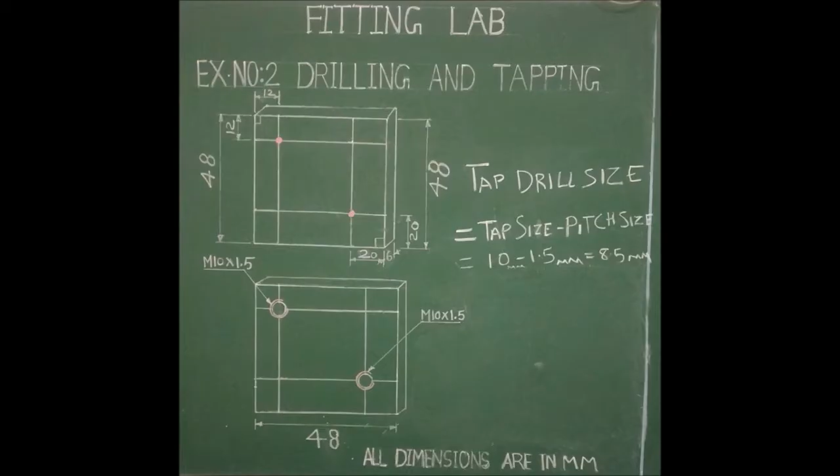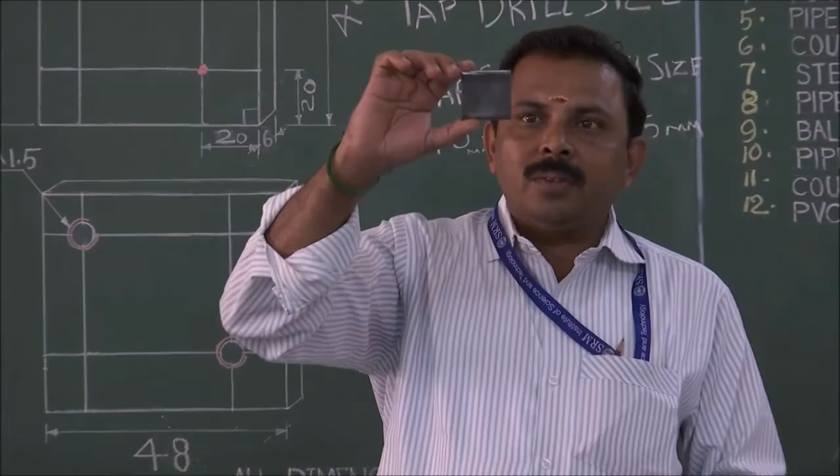Welcome to fitting lab. Today we will do the second exercise, drilling and tapping. I will cover the single workpiece only. The workpiece is made up of mild steel, size 50 mm length, 50 mm breadth, 6 mm thickness.

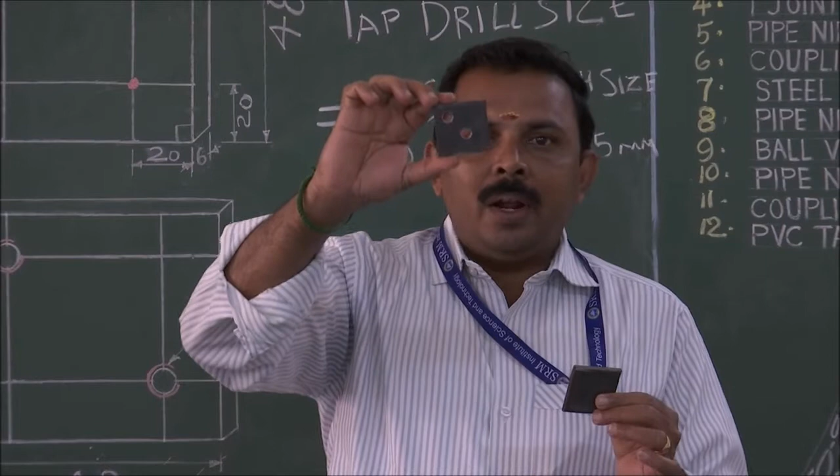We will make a drilling and tapping like this. I will tell step by step how to make a drilling and tapping. First you use the fitting tools, then I will explain how to make a drilling and tapping.

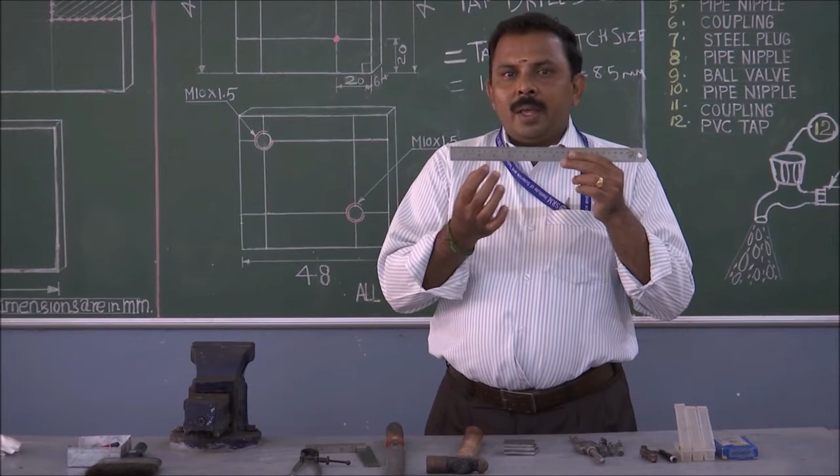First is a steel rule. The engineering name is called a ruler. This is made up of steel, so this is called a steel rule. The accuracy is 0.5 millimeter. It has millimeter, centimeter, and inches. 1 centimeter per 10 millimeter. 1 inch per 25.4 millimeter. This is one of the measuring instruments.

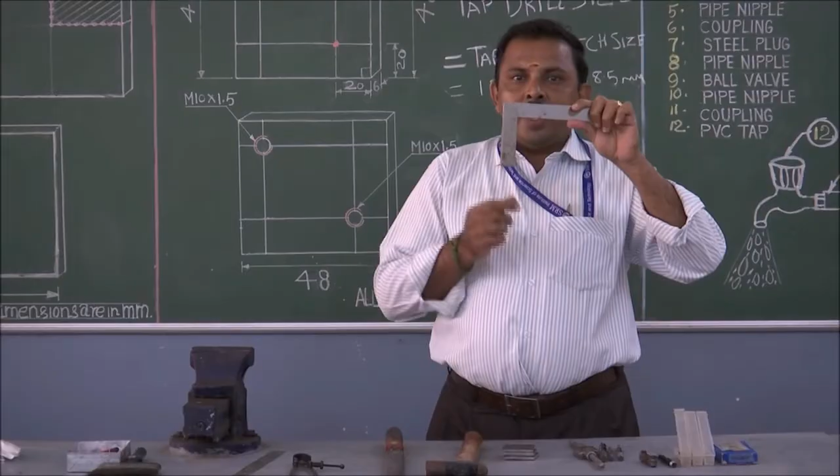The second one is a tri-square. This is a blade, this portion is called a beam or stock. In between is having a 90 degree angle. So we will check the perpendicular, check the flatness, draw the even parallel lines using the tri-square.

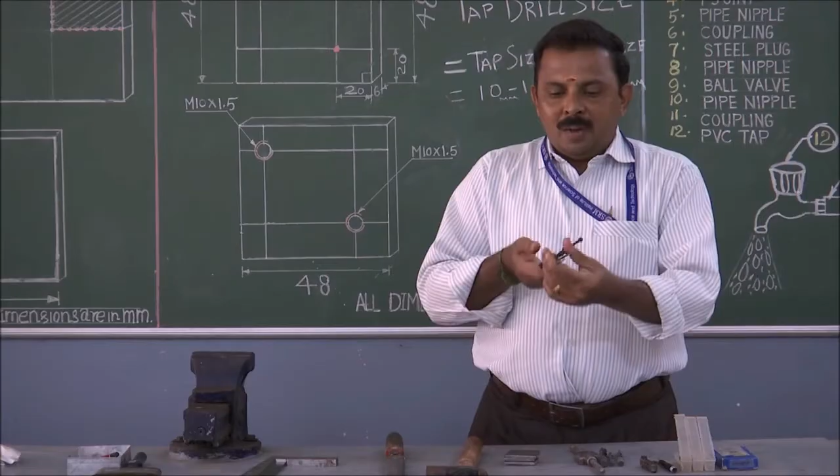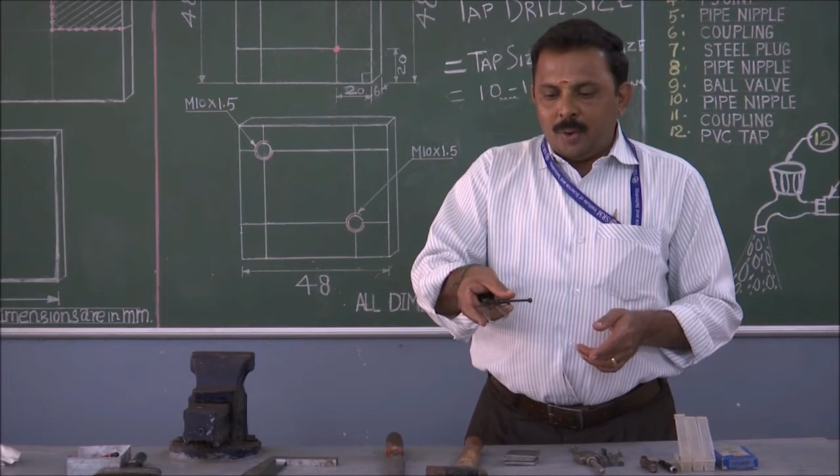This one, jenny caliper, is one of the marking tools. The black part is called a spring, this one is the adjusting screw, and the bent tool is called a leg. The sharp tool is called a scriber. How to handle the jenny caliper? First fully closed, using the middle finger and thumb finger only. Keep it in this position. Rotate clockwise to increase the length, and if you rotate anti-clockwise, decrease the length. This is one of the marking tools.

Next, this one is a 12-inch flat rough file. Length 12 inch, the shape flat, and the grade will be rough. So this is called a 12-inch flat rough file. What about the use of the file? You can rub against unwanted small particles, make a shape, make a smooth surface using the file. The operation is called filing.

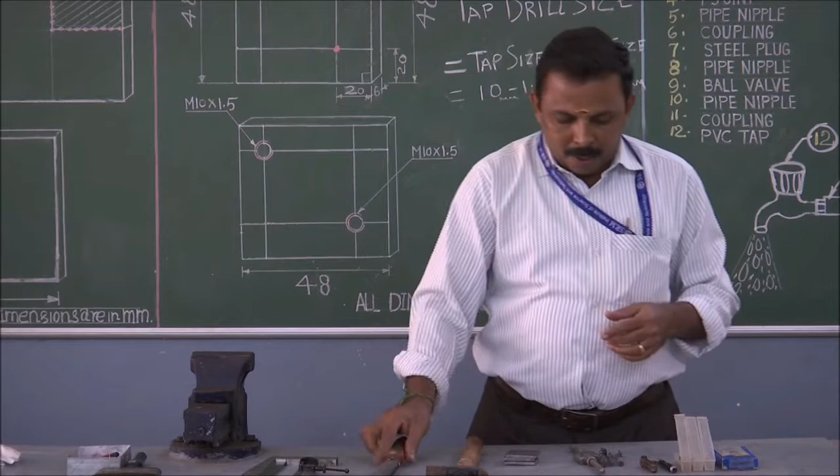The second one is a center punch. This angle is 90 degree, this is a center punch. What about the use of the punch? It is one of the identification tools.

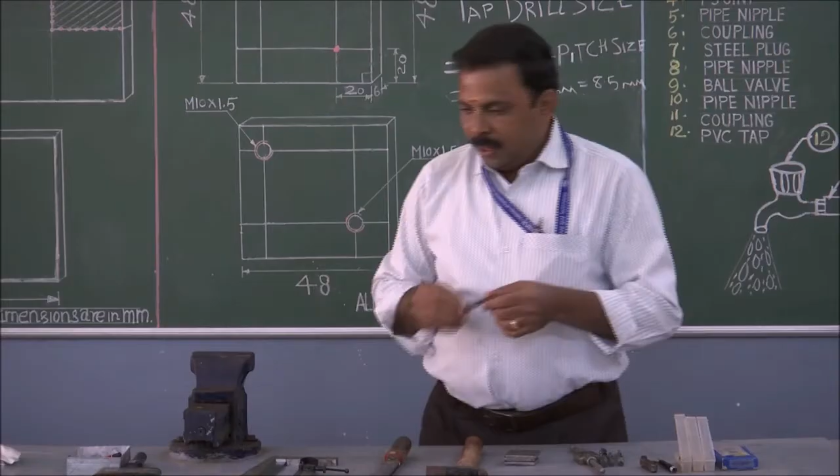Next, this one is a ball peen hammer. This is one of the striking tools. Why is it called a ball peen hammer? The shape is ball peen, so this is called a ball peen hammer. It's for striking purposes.

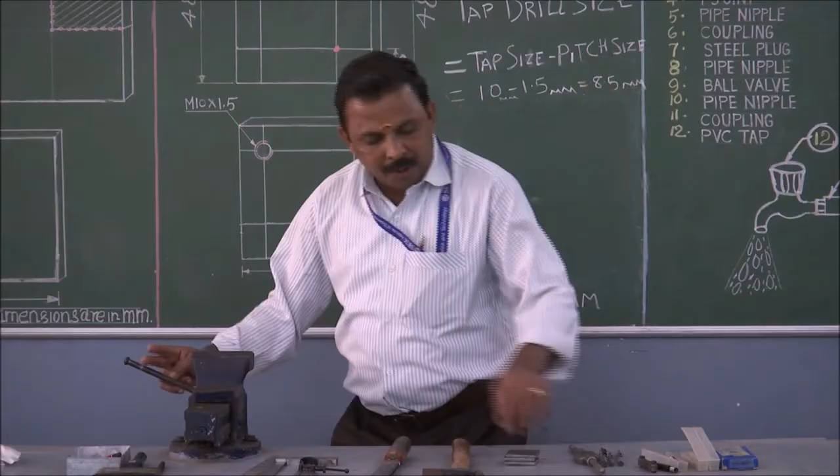Today we will do this one, the bench vise. It is one of the work holding devices. It has one fixed jaw and another movable jaw. If you rotate clockwise, you can fix the workpiece. If you rotate anti-clockwise, you can remove the workpiece. What is called the bench vise? This is a vise which is put on a bench, so it is called a bench vise. It is one of the work holding devices.

Today we will do the drilling and tapping. What is meant by drilling? To make a hole in solid material, use the drill. The drill is one of the drilling tools, it is one of the cutting tools. To make a hole in solid material, use with the drill. The drill is fixed on a drilling machine to make a hole.

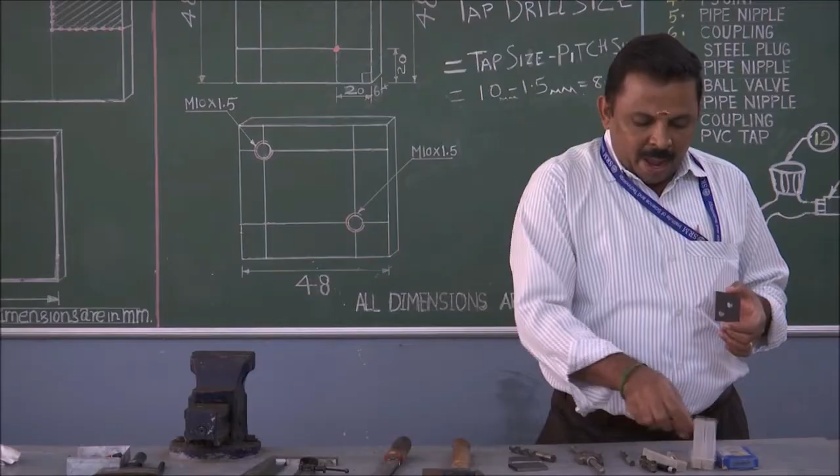The next one, we will do the tapping operation. What is meant by tapping is to make internal threads in drilled holes. That operation is called tapping. Today we will have the hand tap set.

The drill bit angle is 118 degree in between. The drill bit is made up of HSS, high speed steel.

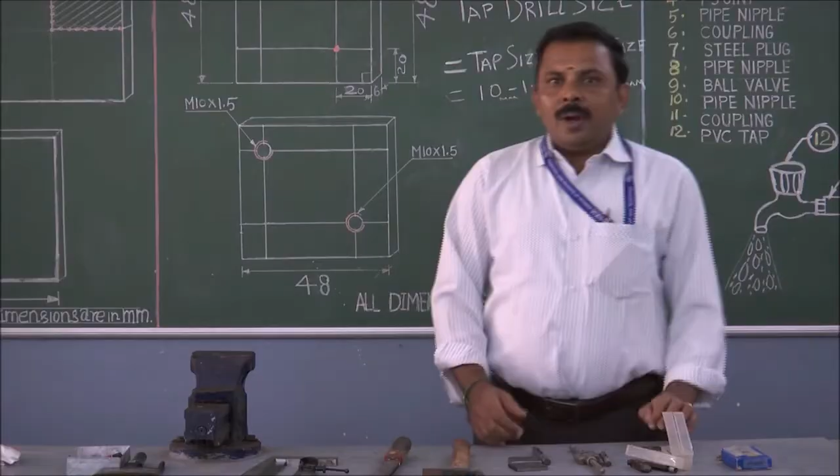What is meant by drilling? To make a hole in solid material, use with the drill. Second, we will do the tapping operation, to make internal threads in drilled holes. That operation is called tapping. Today we will have the hand tap set. The hand tap set has 3 taps, so this is called a set.

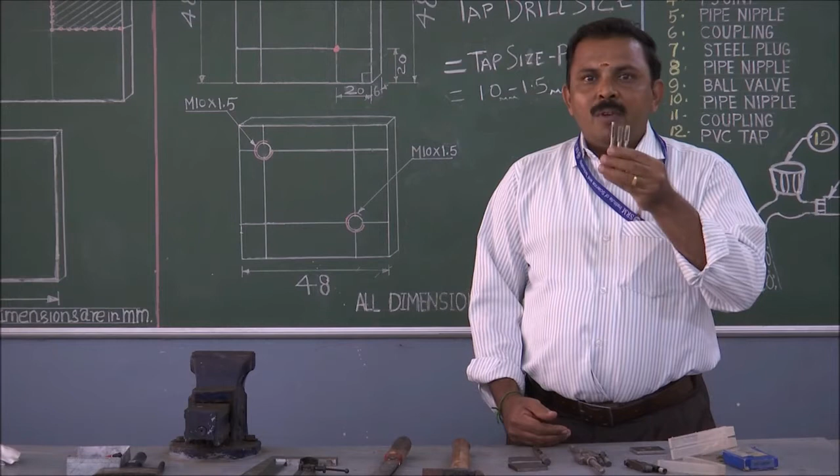The first tap is called the taper tap. The second tap is called the intermediate tap. The third tap is called the bottoming tap or plug tap. We will apply them step by step only: first the taper tap, second the intermediate tap, third the bottoming tap or plug tap.

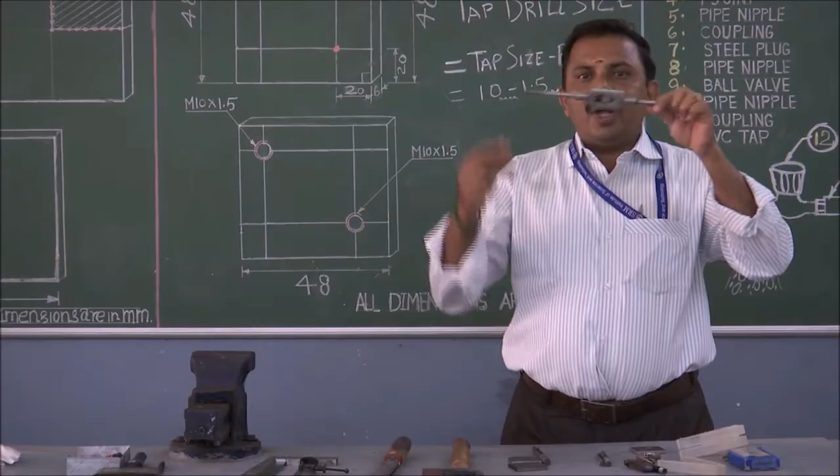How to hold the tap? Using the tap wrench, W-R-E-N-C-H, the wrench is one of the tap holding devices. It has two V-jaws, one fixed V-jaw and another movable V-jaw. To hold the tap, keep it diagonally, then fix the tap, then make the internal threads in the hole. This is one of the tap holding devices, name is tap wrench.

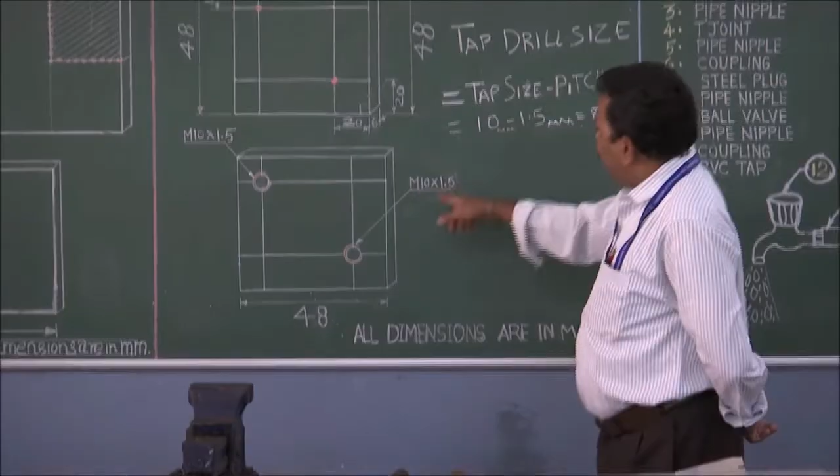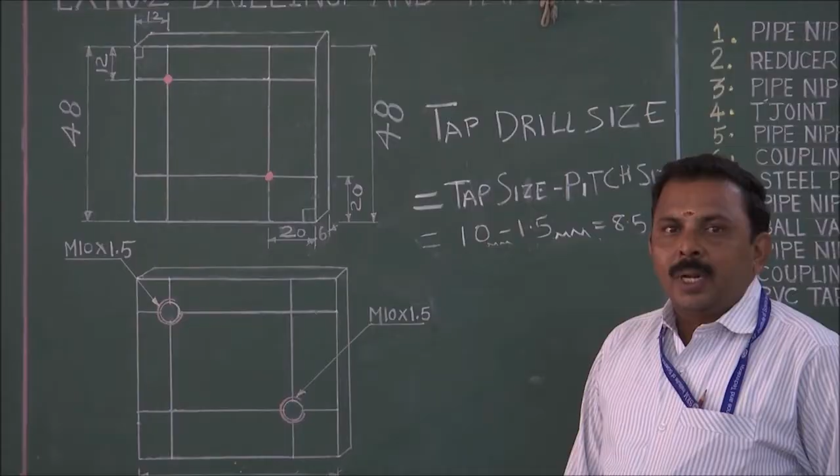Today we will apply the M10 tap. The tap size is M10 into 1.5. The M indicates metric, that is the type of thread. The 10 is for the major diameter of the tap, 1.5 for the pitch. Today we will have a tap size M10 into 1.5. M indicates the metric type of thread, 10 for major diameter of the tap, 1.5 for pitch.

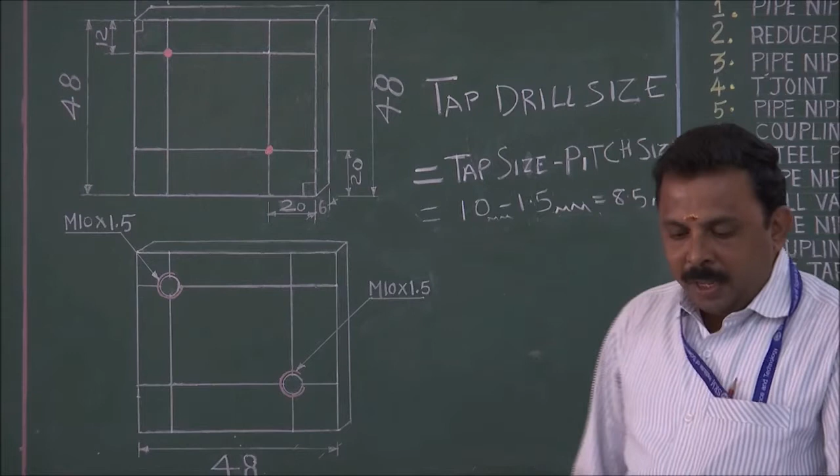What is called the pitch? Two consecutive threads in between, the gap is called a pitch. That means the distance between the two threads. This gap is called a pitch.

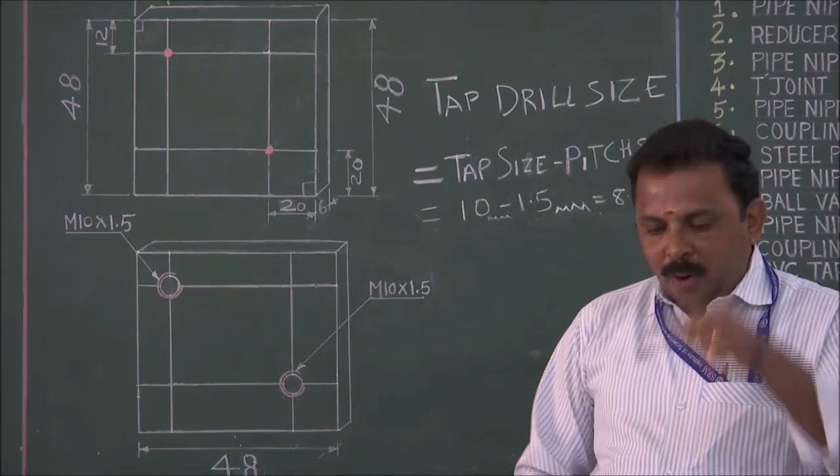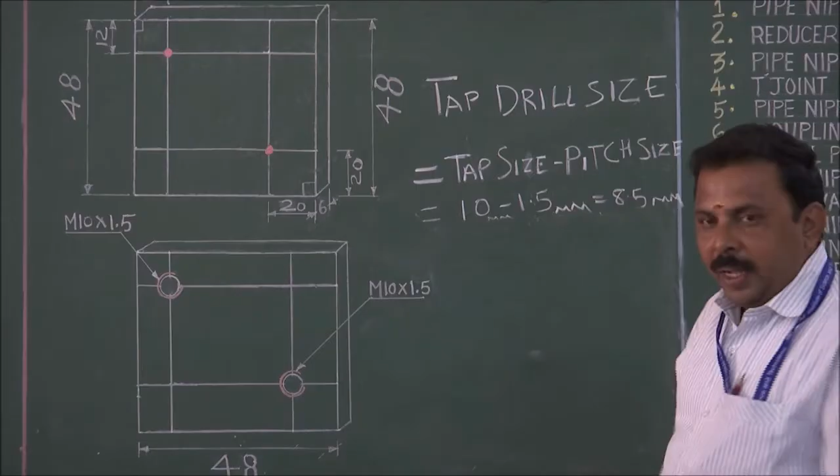You cannot directly apply the tap. So before tapping, you make a drill. The drill is called a tap drill. How to calculate the tap drill size? Tap size minus pitch size. What is the tap size? 10 mm. What is the pitch size? 1.5. So 10 mm minus 1.5 equals 8.5 millimeter.

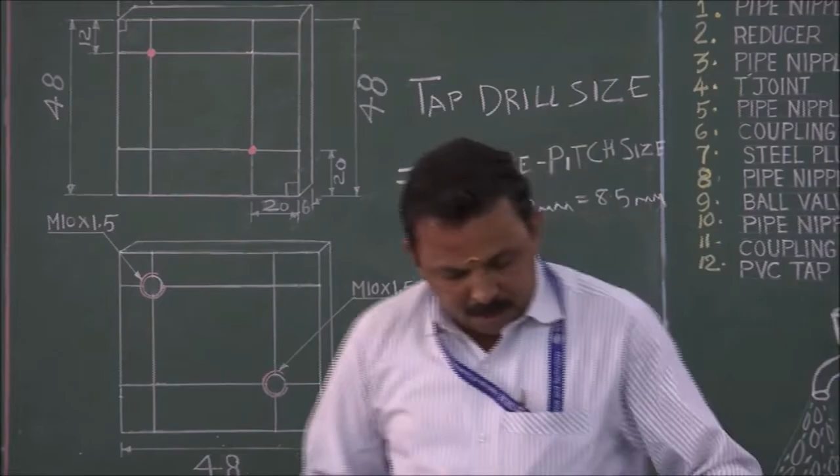Now what will be start? The workpiece is made up of mild steel, size 50 mm length, 50 mm breadth. You can keep like this position.

You can fix the workpiece on the bench vise. Height from here to till here 5 mm only. Don't lift high. If you lift high, the sound will increase. The vibration also increase. So height should be reduced and made to 5 mm only.

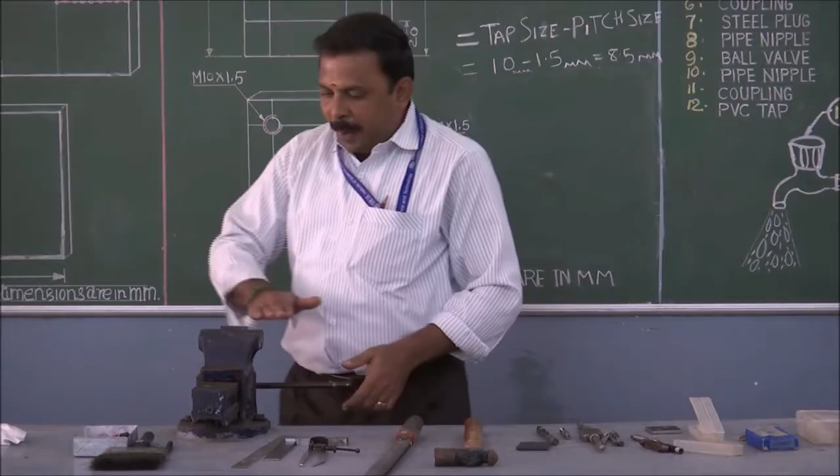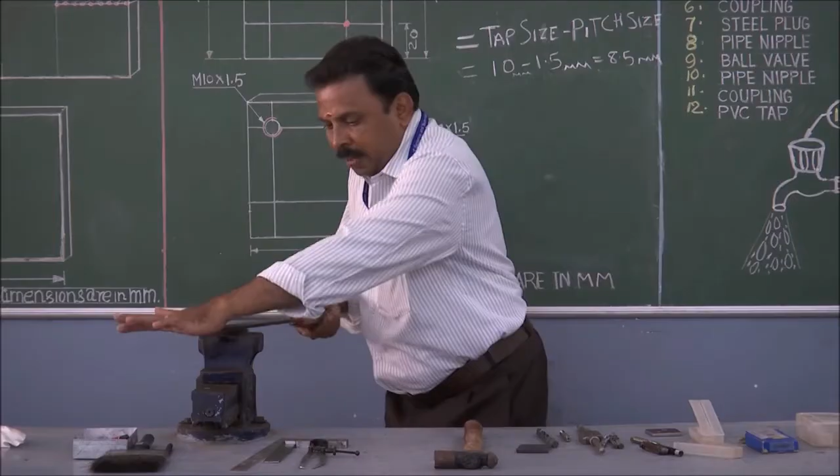Grip the wooden handle with right hand. Hold the left hand like this position. Don't keep it like this or like this, that is the wrong method. You can keep it like this position only. Don't give the pressure, just support only. Keep it like this. First file it on any one side.

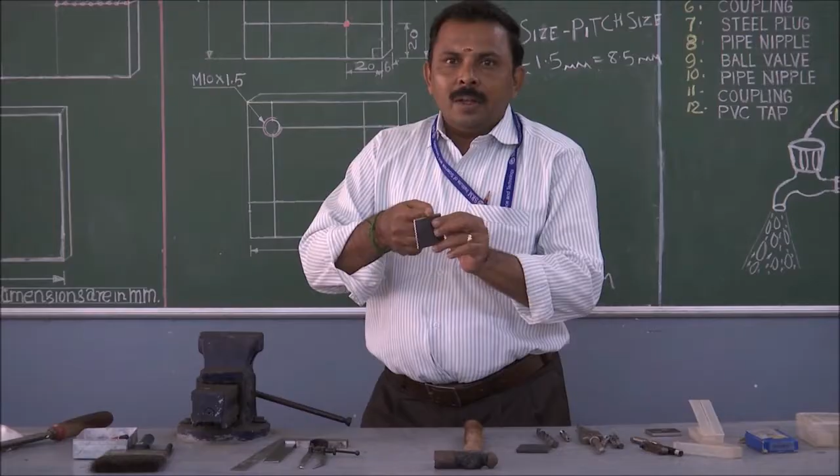Make it level. Then choose any one adjacent side. Keep it like this. I'll tell one more thing. Don't lift high. Height only made 5 mm only. If you lift high, what will happen? The vibration will increase, sound also increase. Then keep it like this position.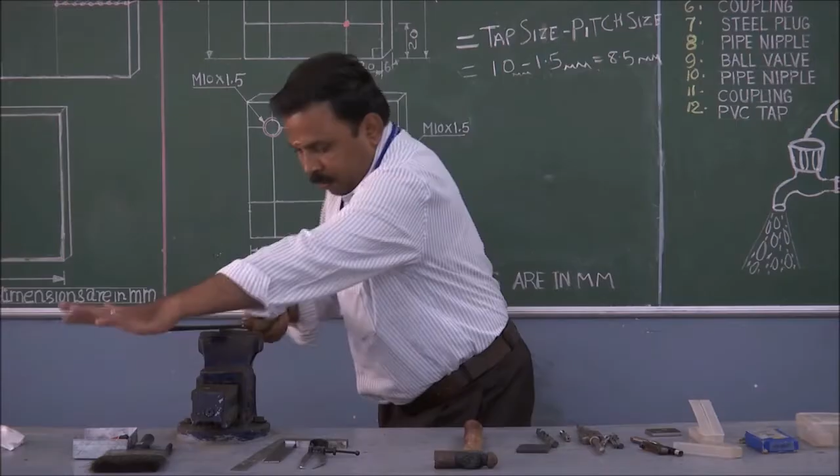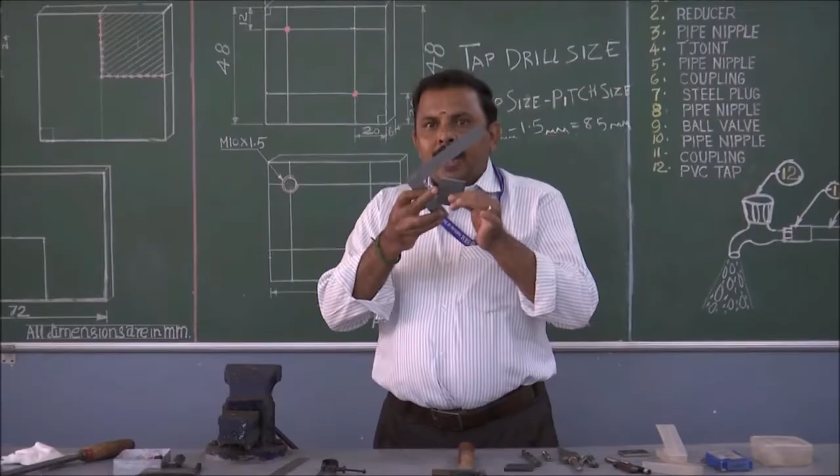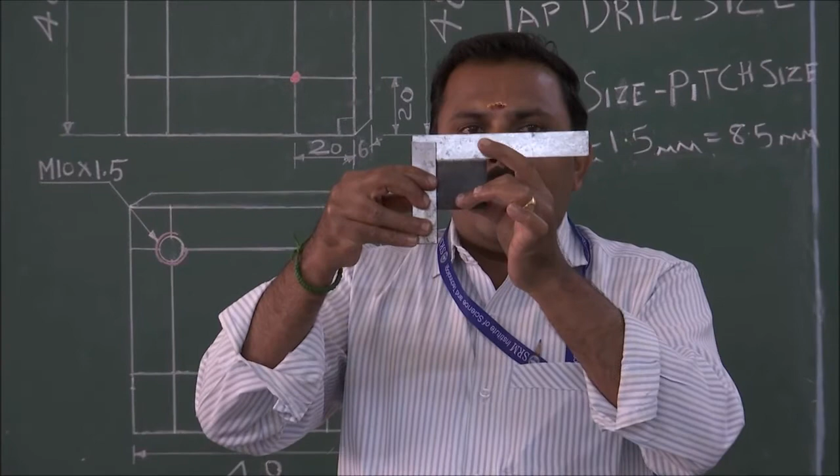Then keep the workpiece in the left hand. Then take a try-square, keep it in right hand. First file it, this side is called the base side. Here also, base to base reference. Then check the perpendicular. The gap in between, light should not pass through the perpendicular. If light passes, you can file it again. It's almost okay. Then file it, make all sides 90 degree.

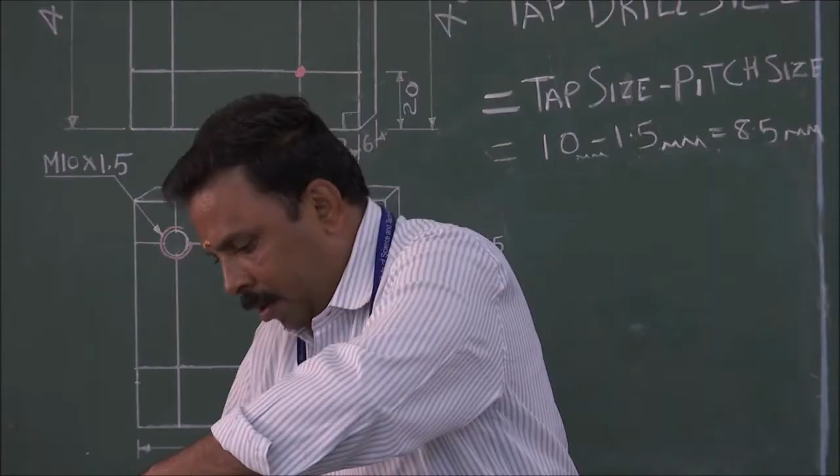Then check the perpendicular, keep it like this position only. This is the wrong method, keep it like this, or like this is the wrong method. You can keep it like this position only. Try-square always keep it in right hand, the workpiece in left hand, keep like this position, then check the perpendicular.

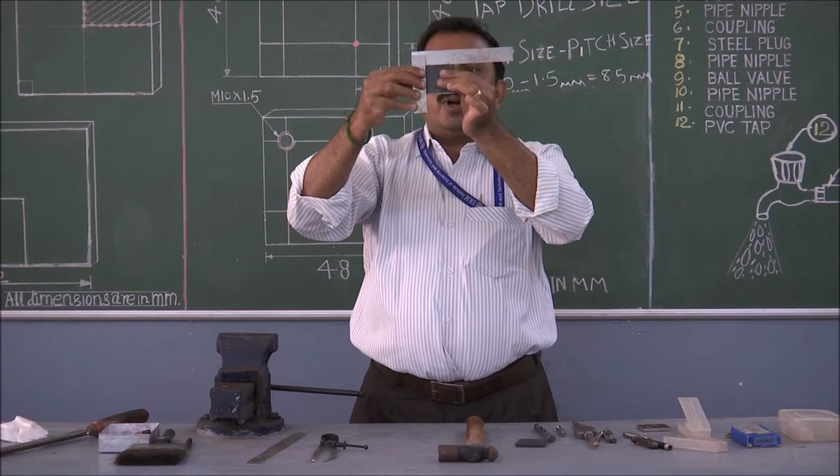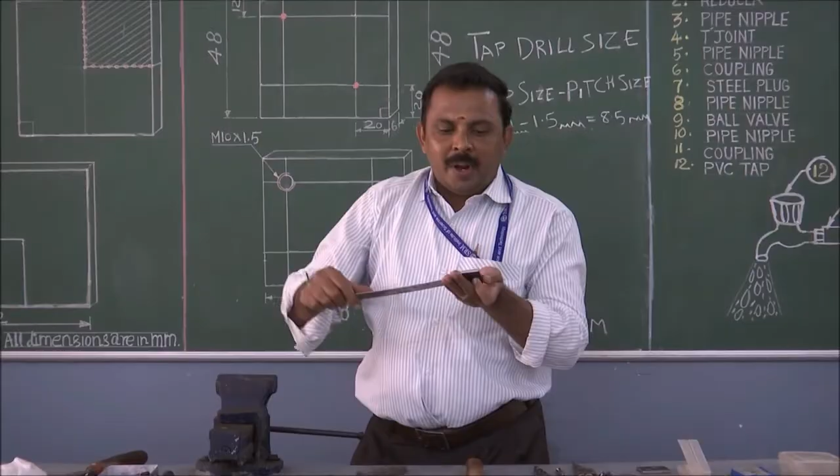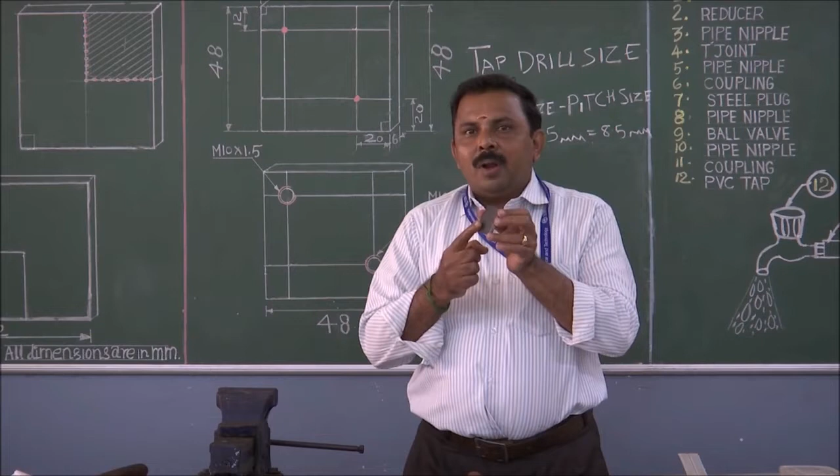You cannot directly mark if black surface not visible. So take a chalk, apply the chalk on any one flat surface like this. Any one flat surface. Take a color chalk or pencil. Indicate 90 degree. 90 degree means your file area means 90 degree.

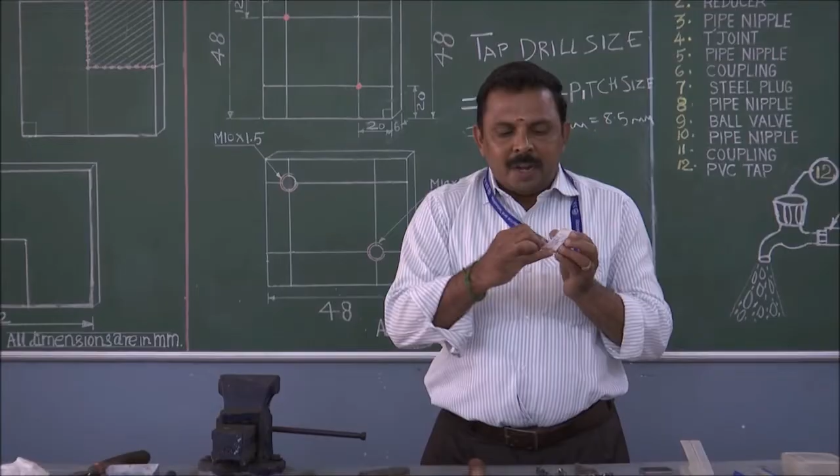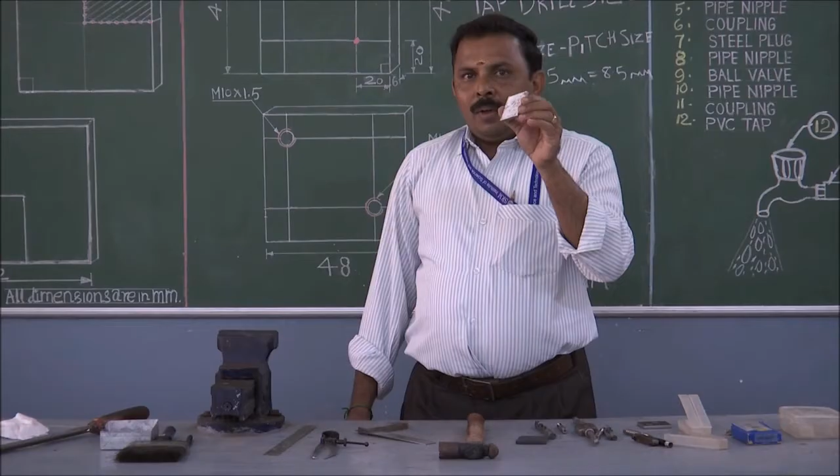It's a 90 degree symbol like this. Then here also 90 degree symbol. You are marking in reference to 90 degree side only. Keep your mind, you are marking always in reference to 90 degree side only.

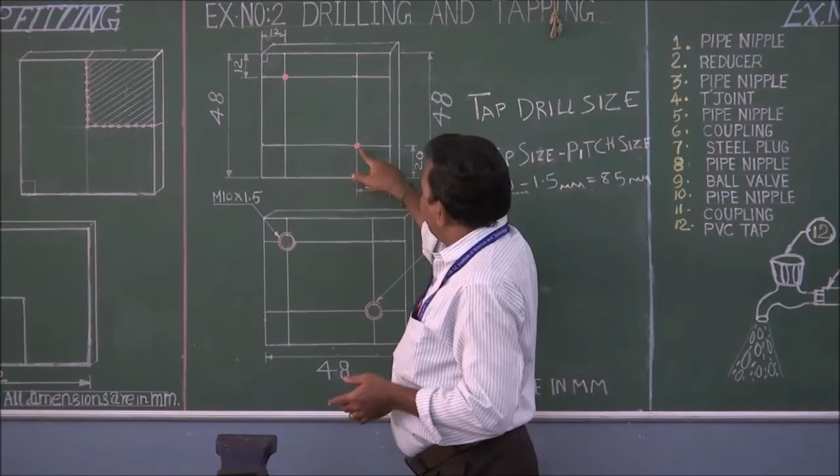From here to the x-axis 20. Then y-axis also 20. Then reference 90 degree side. Your x-axis 12, then y-axis also 12. The intersecting point, put the punch. 20 and 20, and 12 and 12.

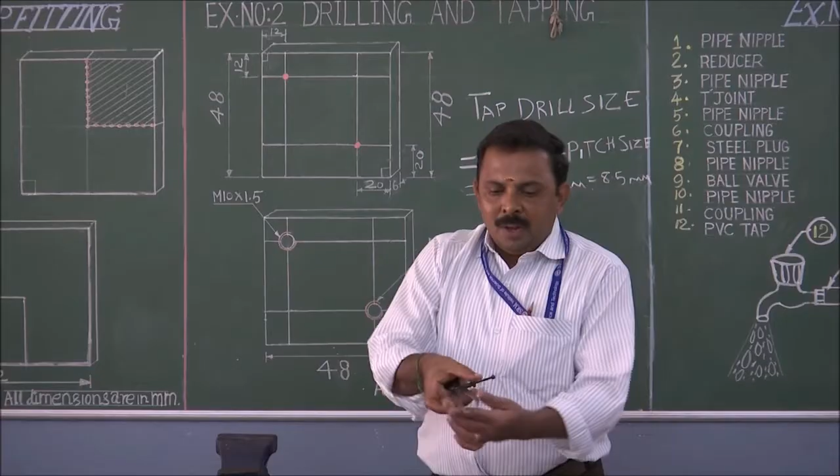What's the name of this one? This is a Jenny caliper. Keep like this position. The middle finger, the thumb finger keep like this. First fully close it. Take your steel rule.

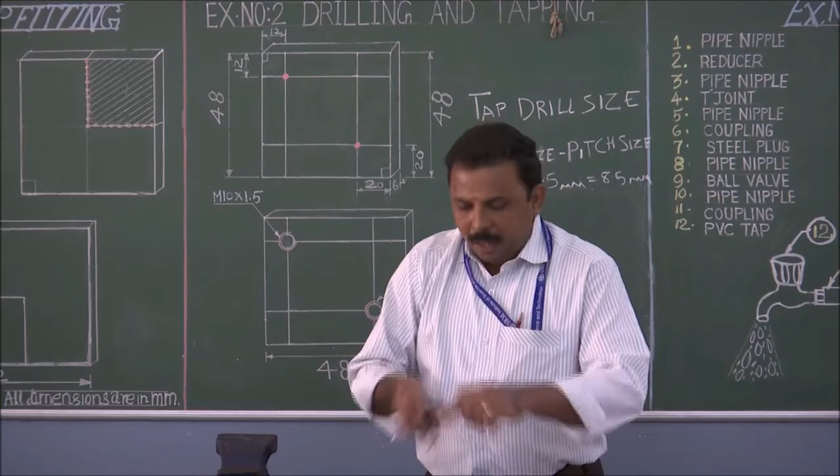It says 0. Keep the 0 in the right hand side. The bent one is called leg. The leg will reference to 0 side.

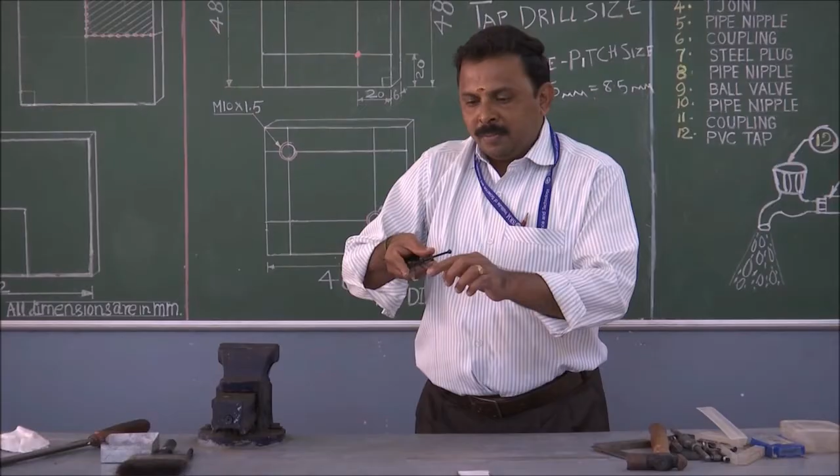First we will take here 20 mm. The edge will put on the 20 on the line. Then thumb finger keep it like this position. You are marking the reference 90 degree side only.

The leg will follow the filed area only. The scriber will follow the surface area. Keep it like this position. First x-axis 20. Then y-axis also 20.

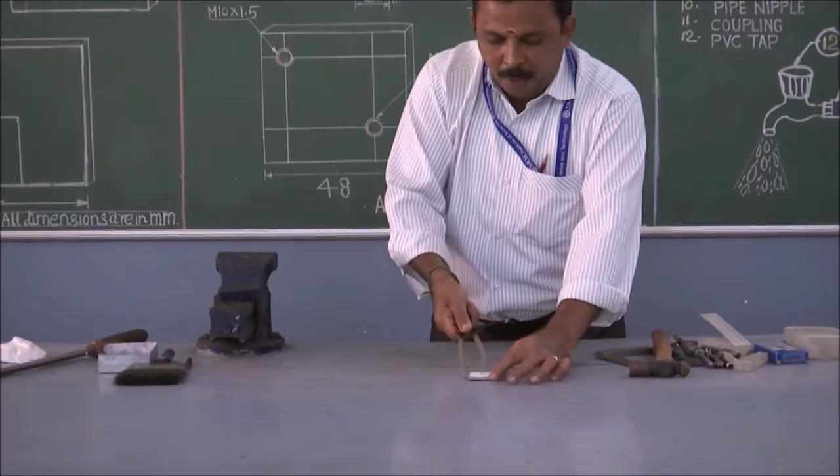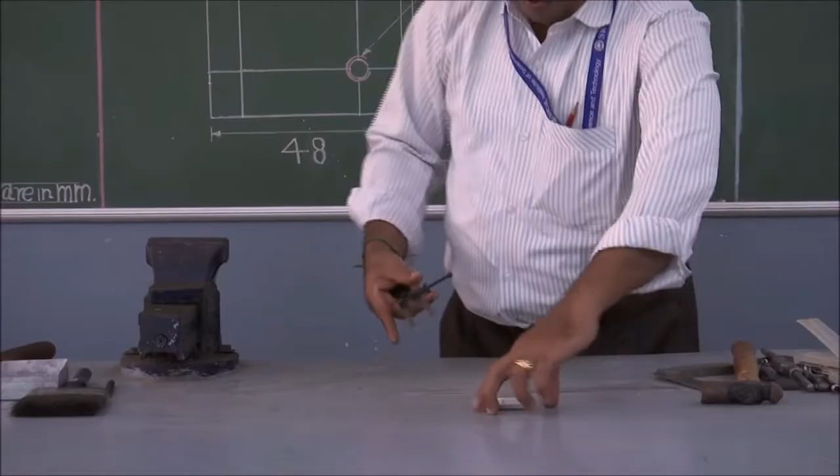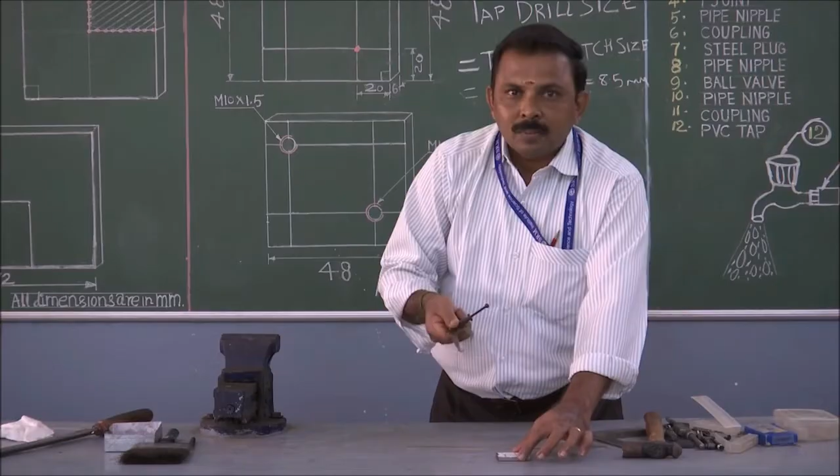Then take it to 12 mm. First take it 12. You are marking the reference 90 degree side only. The thumb finger keep like this. X-axis 12, then y-axis also 12. The thumb finger keep like this position. Give the pressure, then make a line.

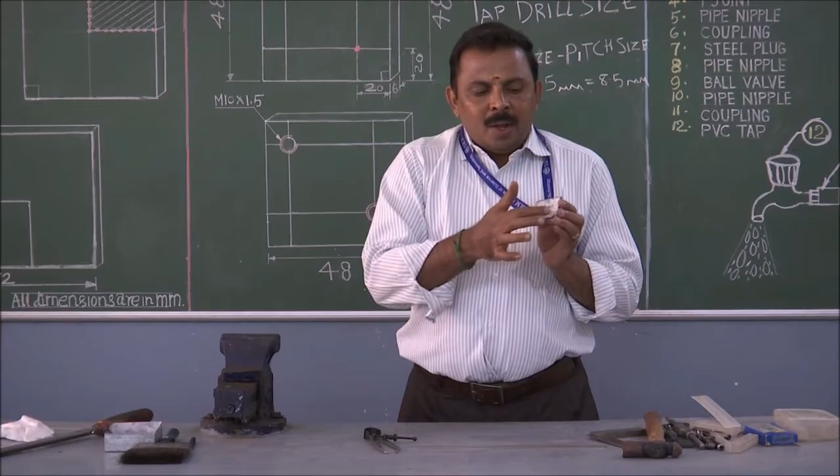See here, x-axis 20 and 20. Then diagonal opposite side, x-axis 12, y-axis also 12. And 20 and 20 intersecting point, put the punch. And 12 and 12 intersecting point, put the punch.

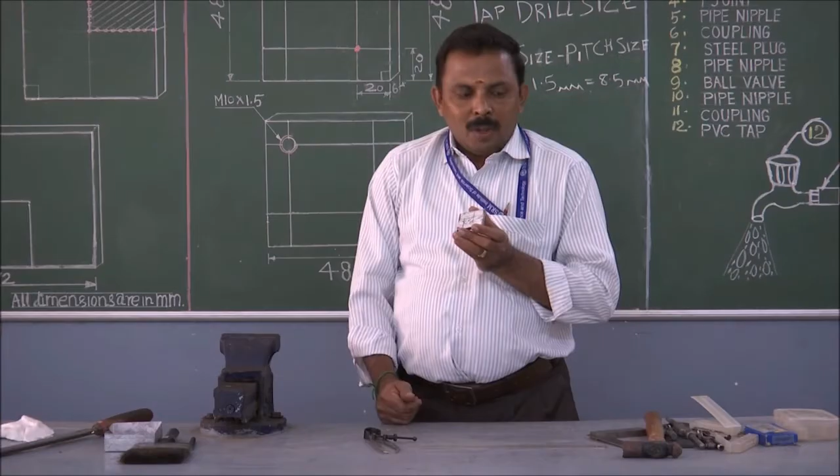Use the center punch. This angle is 90 degree. This here center punch angle is 90 degree. The intersecting point only, put the punch. First place it to the intersecting point. First keep it inclined, then turn 90 degree.

Then apply the punch. Use the pole face only. Don't use the ball peen face, it's only for duty purpose only. Use the pole face only. If you directly keep it at 90 degree, the point will be displaced. So first keep it inclined, then turn 90 degree.

First keep it inclined, then turn 90 degree. Keep your mind, don't directly keep it at 90 degree. First keep it inclined, then turn 90 degree. This is the punching procedure. Then make a drilling and tapping.

After punching, you do the drilling operation. Drilling operation: first you can make any one small drill. The drill is called a pilot drill. Today we will apply the 6 mm drill. Second, we will apply the 8.5 drill. That is called a tap drill. We know how to calculate the tap drill size: tap size minus pitch size. So your tap is 10 mm, your pitch size 1.5, so we will apply the 8.5 mm.

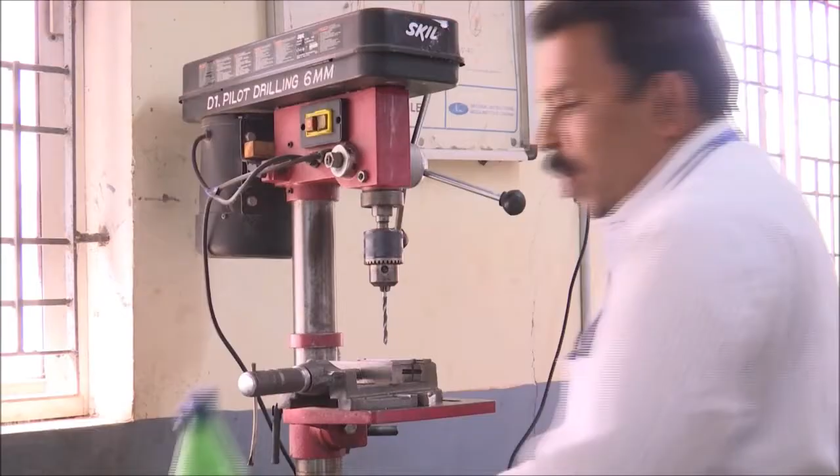This is a column. These are parts of drilling machine. This is a machine vice. This is one of the work holding devices. You can fix the workpiece. Keep it like this. What's the drill diameter? 6 mm. This is a coolant. C-O-O-L-A-N-T, coolant. This is one of the lubrication.

You apply the feed, the drill bit will rotate. What will happen? Heat will generate. The drill bit point will be blunted or the drill bit will be broken. So to avoid this problem, apply the lubrication. Its name is coolant. The coolant oil is mixed in water. The green color button is on. The red color button is off.

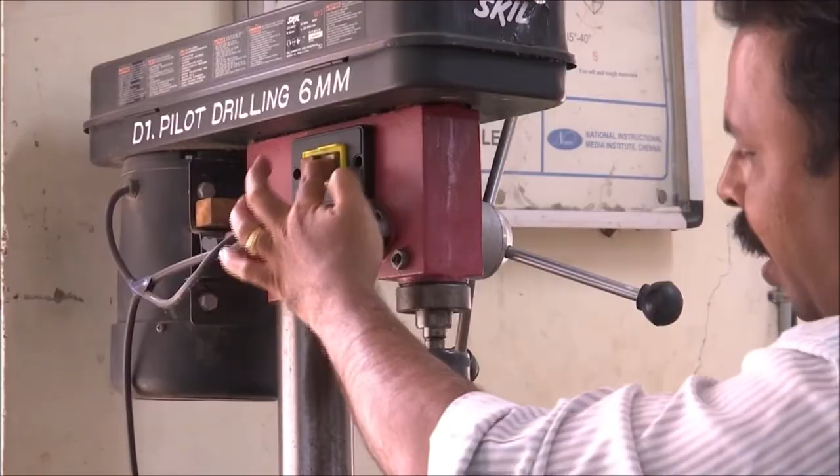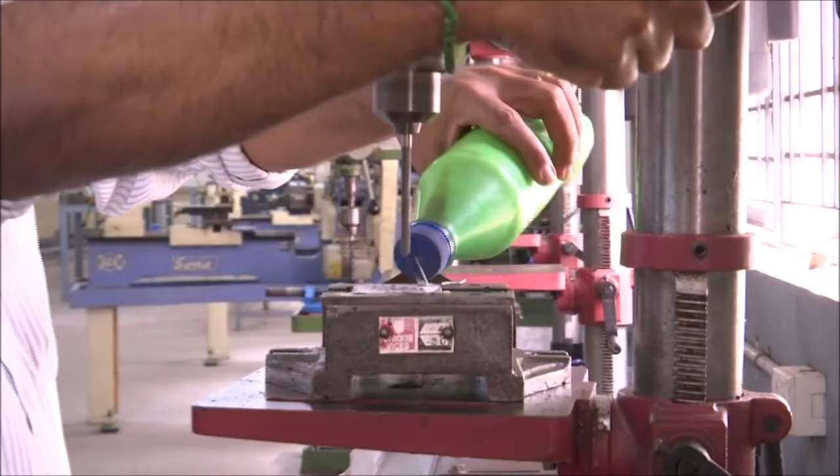You can fix the workpiece like this. The left hand holds it here. Then switch on your machine, push the green color button. 6 mm. You place it at the punched point. After that, gradually feed. The drill is called a pilot drill. And apply the lubrication coolant. First you enter the drill bit, then apply the coolant, and apply the gradual feed only.

At the final stage, use slow speed. Then through the hole, then release the drill bit handle. Switch off the machine. Then clean the workpiece. Then again switch on the machine, then place at the punched point. Apply the gradual feed. The drill diameter is 6 mm. The drill is called a pilot drill. Not 6 mm only; you can apply any small drill. If you have a 5 mm, if you have a 3 mm, you will apply it.

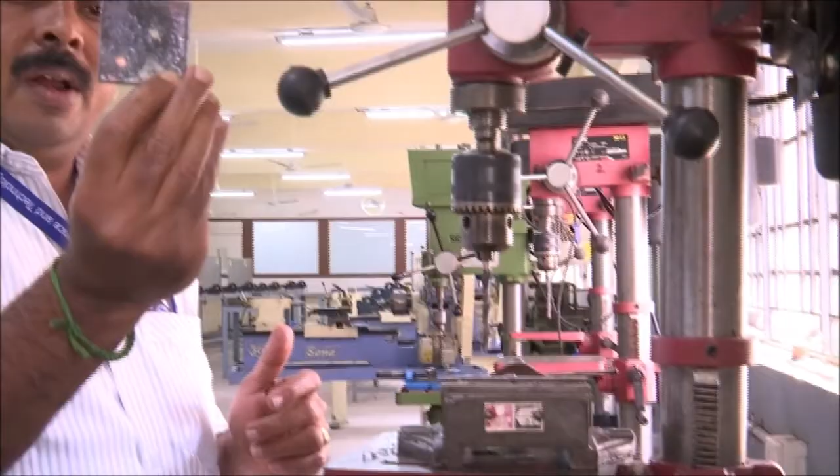Final stage, reduce the speed, then through the hole. Then release the drill bit handle. First switch off the machine, then remove the workpiece. See here, to make a hole in solid material, the drill diameter is 6 mm. The drill is called a pilot drill. Second we will apply the tap drill 8.5. The drill is called a tap drill, diameter 8.5. Fix the workpiece like this.

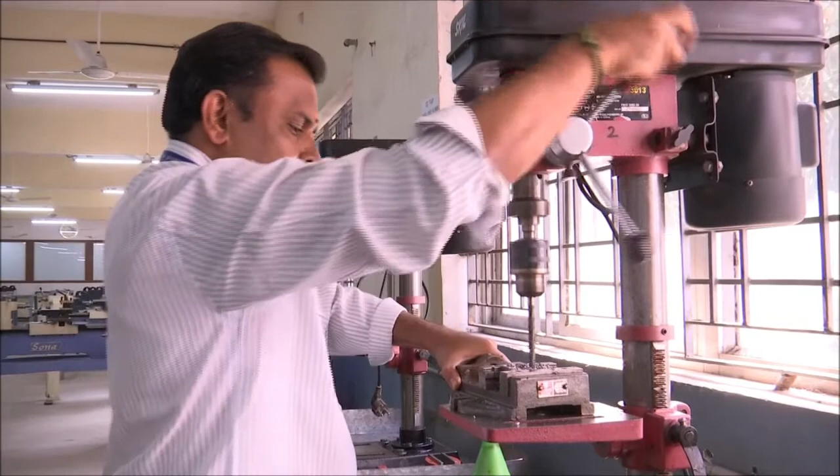Then the green color button is on. Then place to drill the hole. We'll apply the gradual feed, then apply the lubrication coolant. Then through the hole, switch off your machine. Then clean the workpiece. Again switch on your machine. Place to drill the hole. Do the gradual feed. Then apply the lubrication. Keep in mind, don't give heavy pressure. Then apply the gradual feed.

Then through the hole. First switch off your machine, then clean the workpiece, then remove the workpiece. This is diameter 8.5; the drill is called a tap drill. After tap drill, if you have a sharp edge and directly apply the tap, the tap point will slip. So remove the sharp edge. That operation is called countersink. Use the drill diameter 13 mm. For the countersink operation, don't make a through hole, just make an impression only. We'll apply both sides.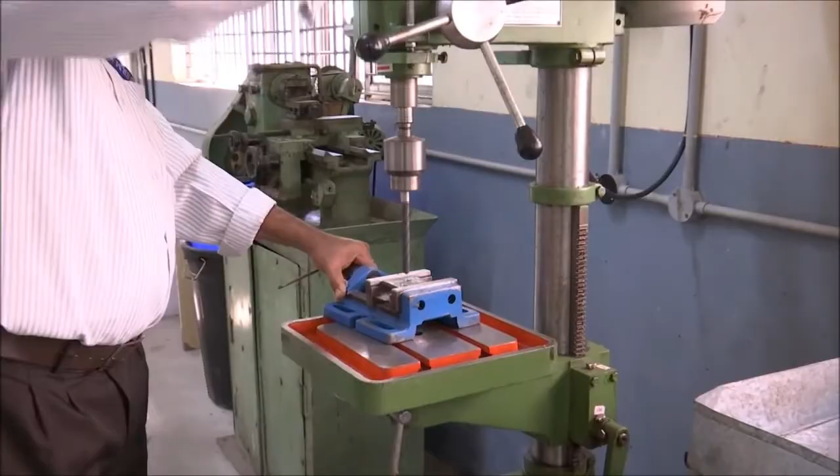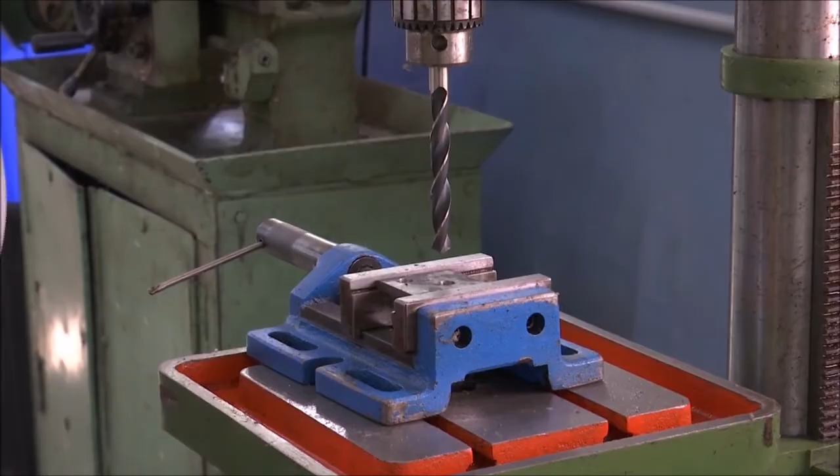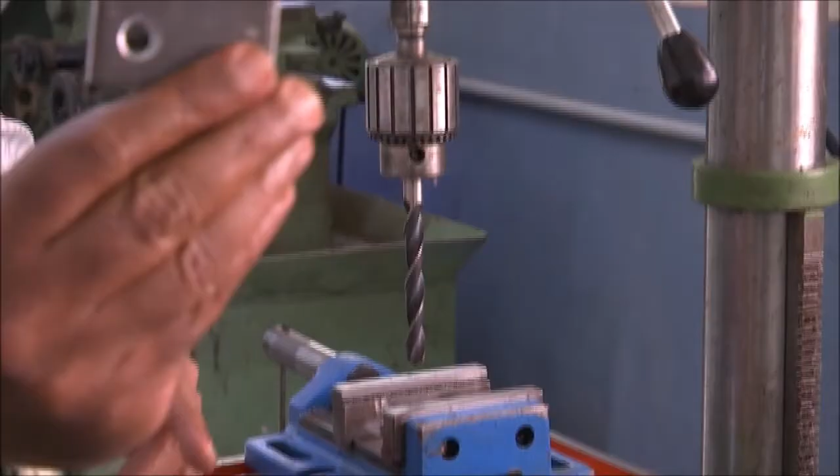You can fix the workpiece like this, switch on the machine; the drill diameter is 13 mm. Make just an impression like this. Switch off the machine. Same method on the other side; we'll apply both sides. This operation is called countersink. Why is a countersink operation needed? So the tap set is easily placed. If you directly apply the tap set, the tap point will slip. Switch on the machine. Make just an impression like this. This operation is called a countersink operation.

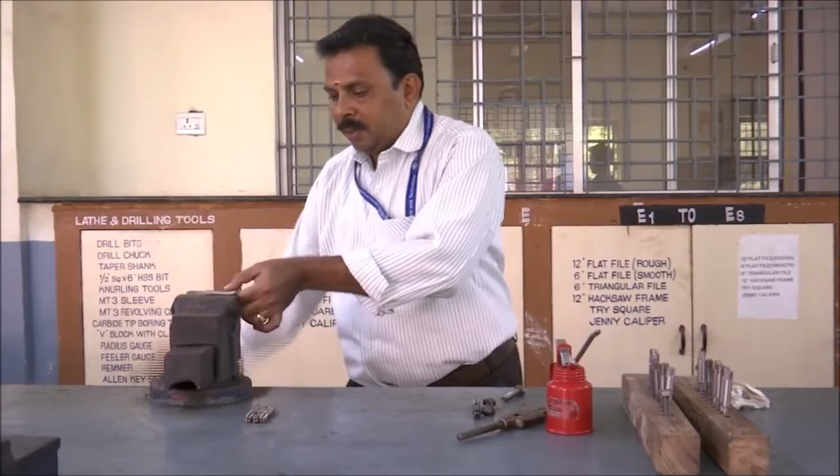After countersink, we will make a tapping operation. You can fix the workpiece like this. Keep it in parallel position, don't keep it inclined. The set has 3 taps. First tap is called taper tap. Second tap is called intermediate tap. Third tap is called a bottoming tap or plug tap. This is a tap wrench. It has 2 V jaws. Keep it in this position, then tighten well.

The right hand thumb finger, keep it like this position. Keep it perpendicular, don't keep it inclined. Keep it in perpendicular position. The thumb finger keep like this position. You give the downward pressure, then rotate in clockwise direction. 2 or 3 rotations, rotate in a clockwise direction. You can feel the grip.

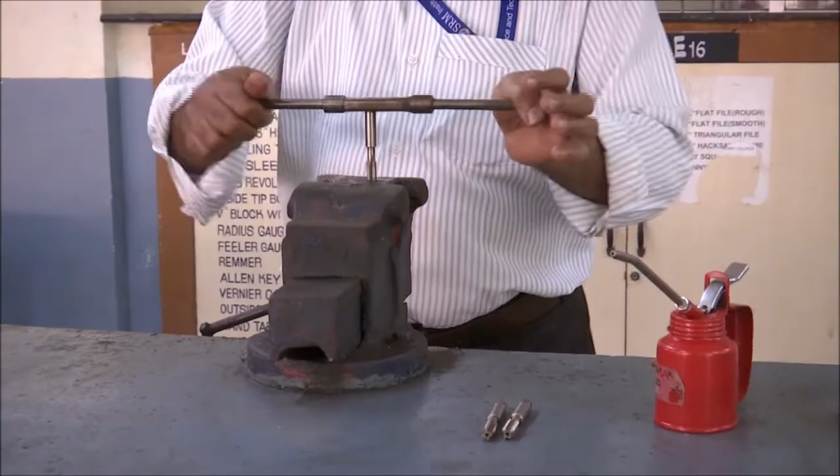Apply the oil, 1 drop only. This is a lubrication oil. Then remove thumb finger, keep it like this position, half turn, rotate in clockwise direction, then anti-clockwise direction. Half turn clockwise, then anti-clockwise direction. Why do you rotate anti-clockwise direction? You cut the threads, and you loosen your cutting chips, so rotate anti-clockwise direction. So half turn clockwise, then anti-clockwise.

You can change your hand, as is convenient. Applying 1 drop of oil only is enough. Half turn clockwise, then anti-clockwise. This tap is called a taper tap. The operation of a taper tap: we cut the threads. Up to here only is enough. The left hand keep like this position. To remove the tap, only rotate in anti-clockwise direction.

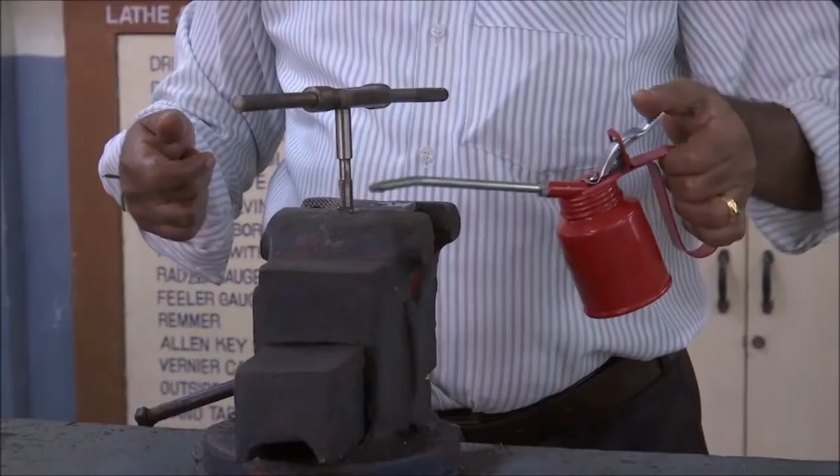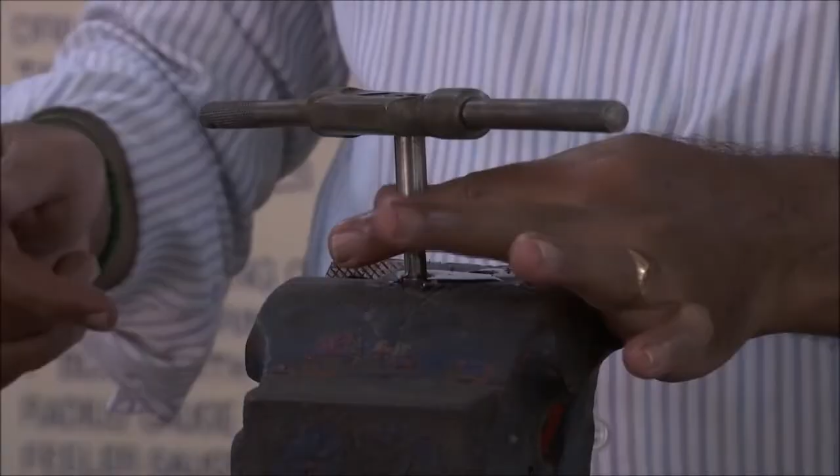Same method for another one also. Keep it perpendicular, then apply the downward pressure, then rotate in clockwise direction. Don't keep it inclined. When you enter the tap, keeping it perpendicular is a must. Then apply the lubrication. Half turn clockwise, then anti-clockwise. Clockwise, then anti-clockwise. Keep it like this position. Then remove the tap, only rotate in anti-clockwise direction.

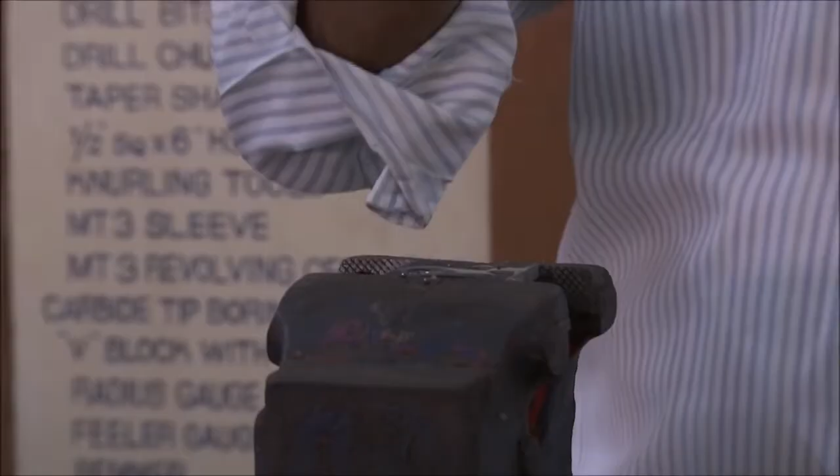Same method for second tap and third tap also. The operation of the first tap: cut the threads. The second tap: forming the threads. This tap is called an intermediate tap. Keep it like this position. Keep it perpendicular. Then apply the downward pressure. Then rotate in clockwise direction. Then clockwise, anti-clockwise. Now no need of oil. You apply the oil in first tap only. The application of the first tap is to cut the threads. The application of the second tap is forming the threads.

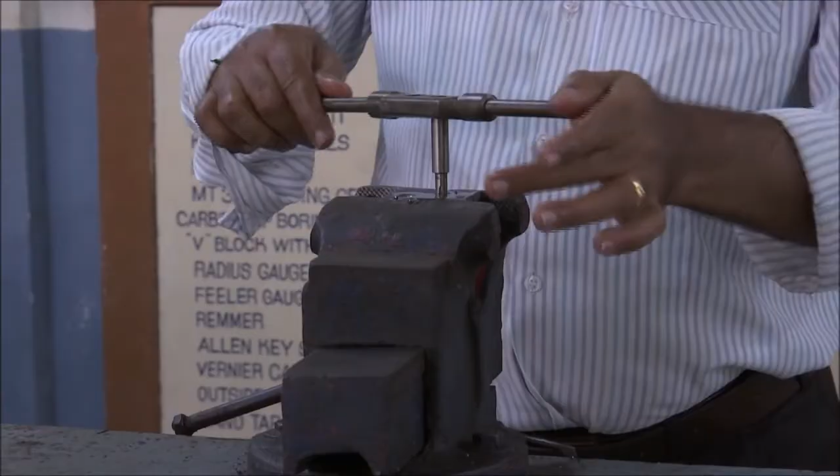Keep it like this position, then keep it perpendicular, then apply the downward pressure, then rotate in clockwise direction, then clockwise, anti-clockwise. Up to here, then keep like this position, rotate in anti-clockwise direction. Keep it here. Then third tap. This tap is called a bottoming tap or plug tap. So fix the tap in the tap wrench.

The thumb finger keep like this position. Keep it perpendicular. Then apply the downward pressure. Then rotate in clockwise direction. You enter the tap. First two rotations in clockwise direction. Then clockwise, anti-clockwise. Very, very important thing: when you enter the tap, keeping it perpendicular is a must. This is a bottoming tap or plug tap. What is its application? Finishing the threads. Keep like this, then rotate in clockwise direction.

Keep like this position, keep it perpendicular. What is the application of the first tap? Cut the threads. The second tap? Forming the threads. The third tap? Finishing the threads. The first tap is called a taper tap, the second tap is called intermediate tap, the third tap is called a bottoming tap or plug tap. Keep it like this position, then remove the tap, only rotate in anti-clockwise direction. Very important: when you enter the tap, keeping it perpendicular is a must.

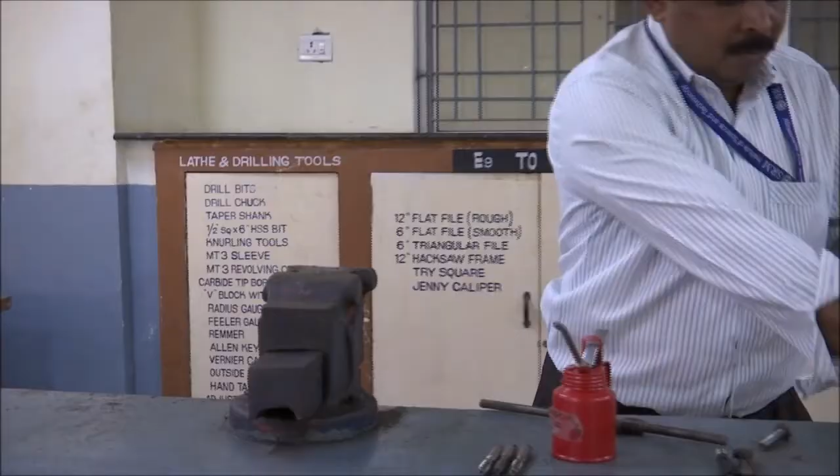Take cotton waste, clean the oil surface. This is a thread plug gauge. One side has a go, the other side has a no go. Size M10 x 1.5. This is the go. The go will enter. This one is no go. This will not enter. So the job will be accepted. How to check your job? Using the thread plug gauge. It has a go on one side and a no go on the other side.

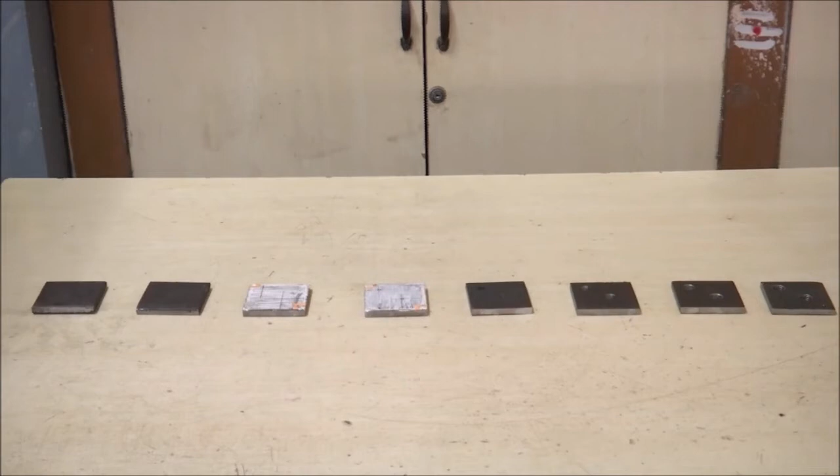The drilling operation is completed. Let me explain the sequence of operations. The first one is raw material. Second one is preparation. Preparation means making all sides 90 degrees. We maintain the length 48, breadth also 48. File it to 48. Next, apply the chalk, and for marking, reference 90 degrees, mark as per diagram: 20 and 20 and 12 and 12. After marking, punching. At the 20 and 20 intersecting point put the punch, and at the 12 and 12 intersecting point put the punch.

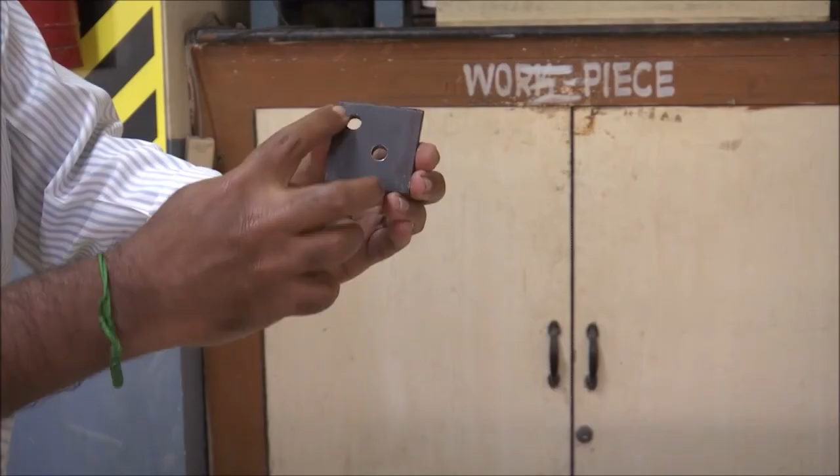After punching, drilling. First apply the 6 mm pilot drill, through hole. The second one, tap drill 8.5, diameter 8.5. Third operation, countersink. Use drill diameter 13 mm. Make just an impression only, on both sides. After countersinking, do the tapping operation. Tapping is completed. This is the sequence of operations: first preparing, second marking, third punching, fourth drilling, fifth tapping.